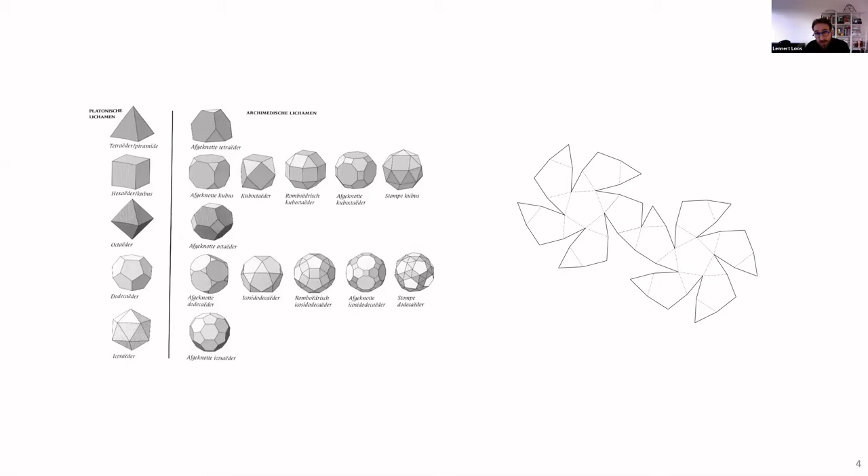And the two people that you see on the picture here are the main forces behind the project. It's Bastien Damsin and Thibaut Brands, and the latter one is currently also a colleague of mine. So we had no idea how to start with such a project. So we read some literature about it, and we started looking up the Platonic solids, and we tried to look for a shape that allowed us to approximate a bit a spherical shape, because in the end we need to inflate the entire structure. And so by unfolding the entire geometry, we created a kind of cutting pattern, as you see on the right, and then the main job starts.

So you buy sheets of foil, you have some patterns that you need to cut out, then you cut all these patterns and you tape them together. And so we used tape in order to seam all these different patches of foil, but we also explored other ways of manufacturing. For instance, welding different sheets of foil together with the help of ironing and burning these edges together, or melting these edges. And so that's what you see here.

So in the end here, we have a lot of flat material connected to each other, but still flat on the ground. And then the first test was to actually inflate the entire structure. And that was the first time that we were able to actually feel and see how the structure reacted on being inflated. We could see how much force it could take, how our duct tape was actually working. And you see that we use very high-tech equipment like the fan of the secretary's office. But in fact, this was the first time that we actually gained knowledge about this kind of structure.

And I like this picture a lot because it shows the different scales and it shows the process that we have been through, starting from very small paper models. And in the background, you see not a flat paper model, but an inflated, more round structure, partly inflated. But obviously, in the end, we wanted to organize a whole range of events inside this entire structure. So I think it was a good idea by the students to already organize a screening inside our first and last prototype that we made, because we had no idea how people would react while being inside and being surrounded by plastic.

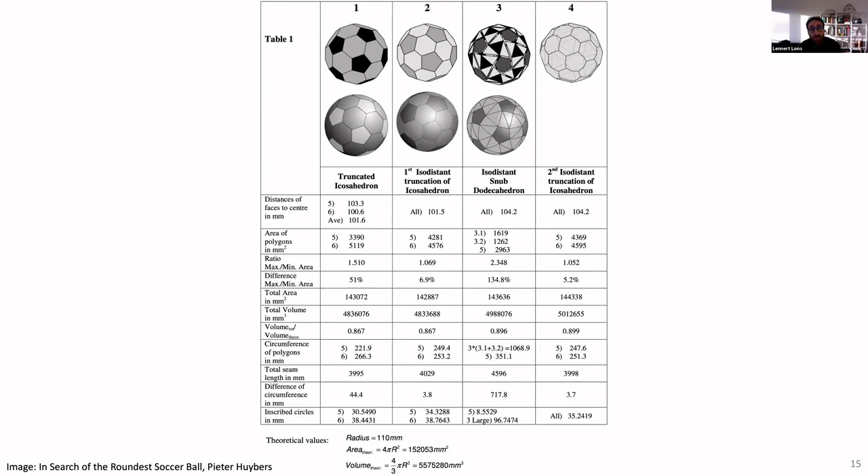And the duct tape was in fact the most expensive part of the structure. It was 50 cents per meter. But if you do that for a large air bubble with a diameter of 15 meters, then it adds up quite quickly. So that was not really a good option.

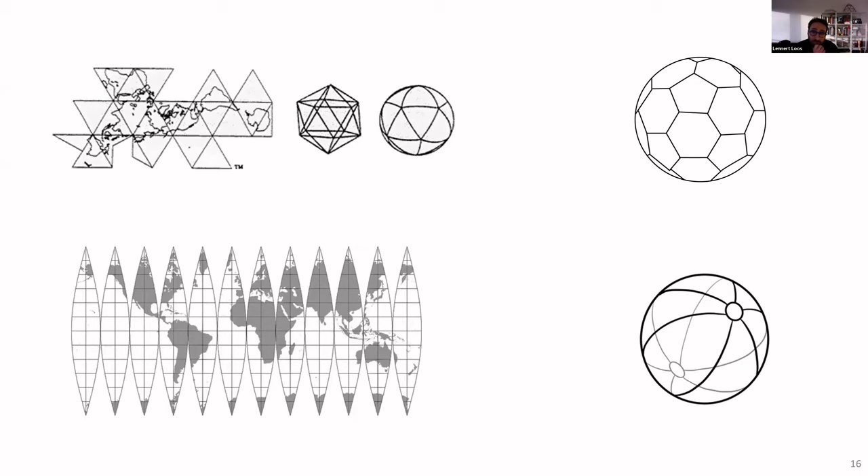So at first we were thinking about Dymaxion maps, the Dymaxion maps of Buckminster Fuller, and relating that to the final structure. But we shifted from that idea towards, let's say, a beach ball or the more regular Mercator map. And so with all the knowledge that we had about the time needed to cut, the time needed to patch everything together and to apply tape, we optimized a bit for minimal tape length.

And this is what came out. And then we had equal parts that could be cut out multiple times. So we laid out a pattern on the floor, and then we aligned our sheet of foil on the ground and we cut it out. And as you can see, this is a very, very quick process.

Jokes are not working in Zoom, right?

So then we had all these patches of foil, and then the most difficult part of the job started. We needed to tape them all together. Where we started initially with this icosahedron shape, this Dymaxion map, they are all flat, and you can already assemble quite a lot and everything remains flat. While now with these beach ball shapes, with every part of the seam that you tape, your flat structure is becoming more curved, because in the end we are working with a spherical object.

And so that's quite difficult, and we taped not only the outside or the inside, we wanted to tape both the inside and outside in order to reduce the air losses in the large balloon. And so we started at the outside, and once we had the outside seams taped together, we blew it up a bit and people could go inside and also tape the inside of the seams.

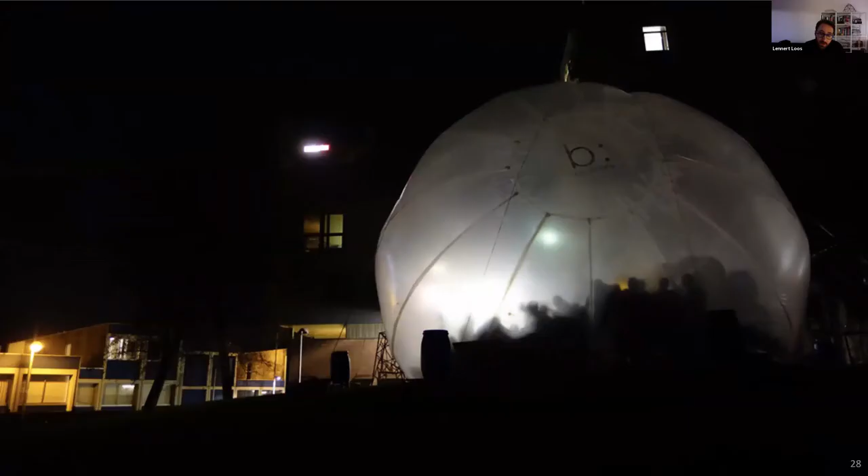We inflated it. We used large vessels of water to ensure our anchorage system, and we used 1.5 meter steel pins in the ground to keep everything at its place. And I think this picture shows very well the size of the balloon. It's a kind of surreal size, and in the end, we were all very happy with the result.

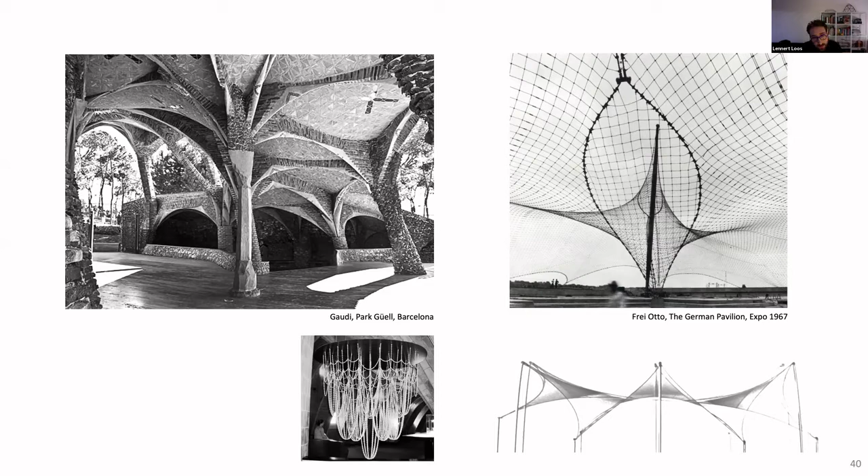And so if you think of modeling and structural modeling, from a structural design point of view, you immediately think about the models that Gaudi and Frei Otto made with the help of hanging chains and soap models, not only to understand the structural behavior or the structural form finding, but also to see what the final structure would look like. Just like the story that I told about the large air balloon, you are gaining insight, you are gaining an understanding based on making models and tests. And based on that, you will proceed in the design. But nowadays we have translated the laws of nature into algorithms, and so we can do it digitally at our desk with the help of computers.

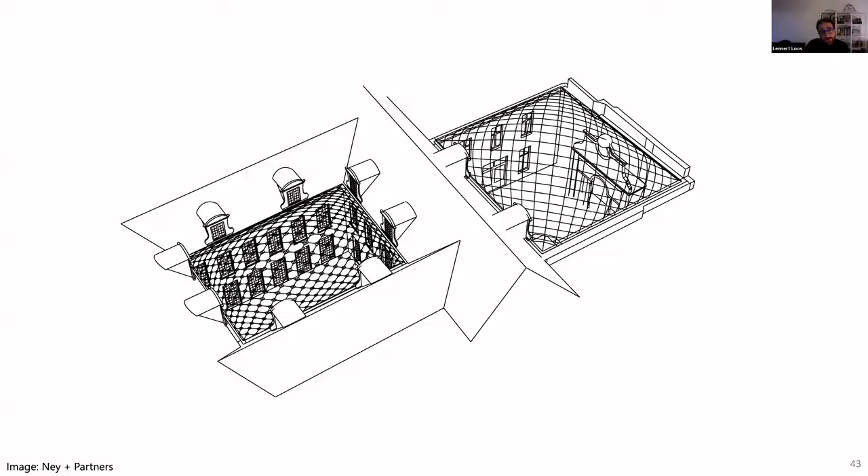But that brings to the front the question, in what way are we actually gaining insight with the help of digital tools? How well are digital tools facilitating design? In design, it is important that you make comparisons, that you are aware of certain design choices, that you are aware of the impact of that. And so while doing research at the university, I investigated parts of this digital design process. I would like to show a small example to show you the pitfalls that might appear while designing digitally. I would like to refer to a project of Ney and Partners in Antwerp, the Oosterweel house, where the design involved the construction of two glass and steel grid shells on top of two existing courtyards. And so this is what the final result looked like.

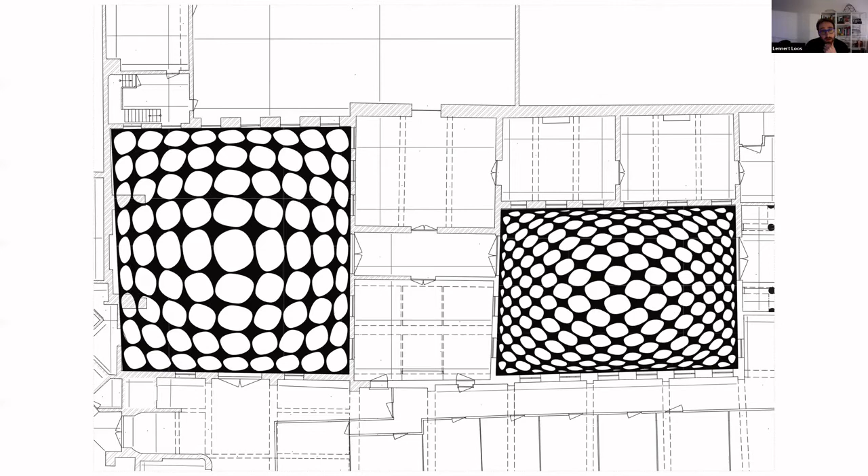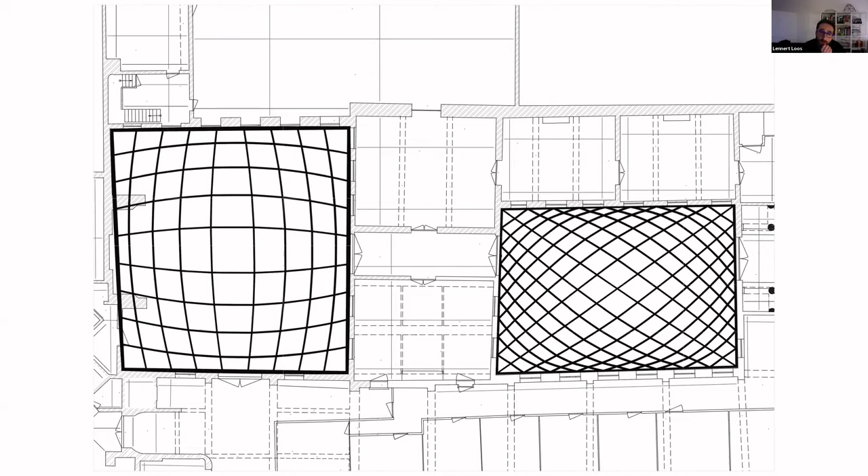But from a digital design perspective, we have a lot of tools available. We can do form finding, we can make structural calculations on the computer, we have parametric modeling tools and optimization. So we have endless possibilities to generate a whole range of design solutions. And that's also what Lauren said in the introduction. There is no issue anymore to explore your creativity and to come up with a million different design alternatives. We can make minor or major changes and come up with a whole bunch of different design solutions. And from an aesthetical, architectural point of view, you can have a certain preference about which design alternative you think might be the best solution.

But from a structural engineering point of view, you want to get informed about the structural behavior, about the total mass of the structure, how sustainable our structure is. You have questions to solve about how it will be constructed, what the reaction forces are on the existing courtyard walls. And these are things that need to be assessed, just like in prototyping. By making comparisons of a whole bunch of design alternatives, you actually get informed about a whole series of these questions. So you get informed about the influence of a certain design parameter and its impact on a whole series of assessment parameters.

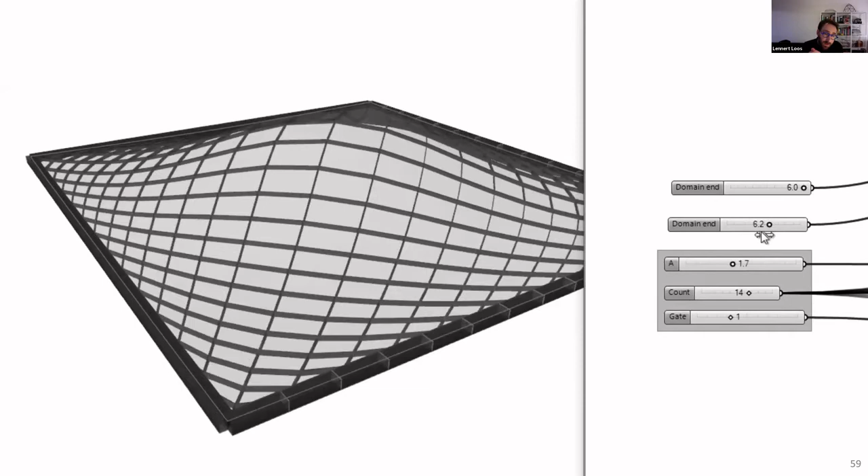So how do we get from a series of design alternatives towards our final choice? And so the question that I will ask today: let's assume that we have parametric models and that we can generate 1 million different design solutions. How, as a structural designer, are we able to actually make informed decisions, and how are we able to understand what these differences between all these different design alternatives that we generate actually are?

But that brings us to the question, are we going to let the computer decide which design alternative is the best solution? Well, what the computer gives you as a solution is indeed the best solution for the boundary conditions that you tell the algorithm to search for. But obviously, as I said earlier, there are a whole range of assessment parameters which are non-numeric, which can hardly be integrated in algorithms, like architectural preferences, certain requirements made by the client, also knowledge from previous work that you have done, certain expertise that you have. It's hard to translate these in a pure optimization algorithm.

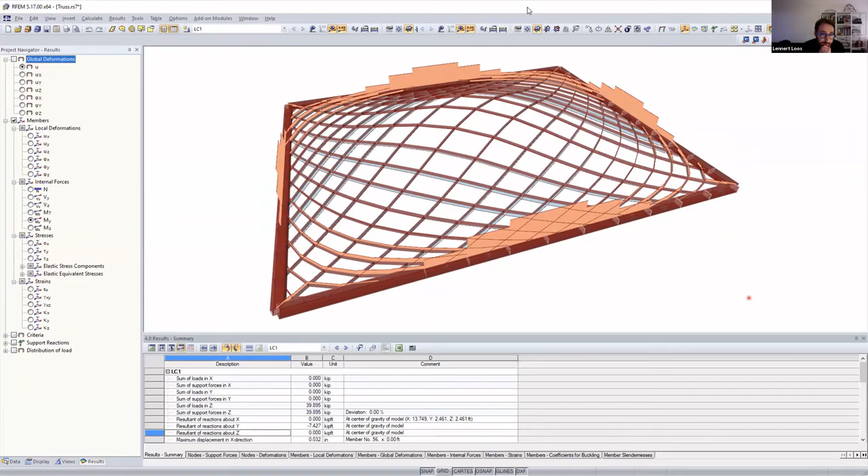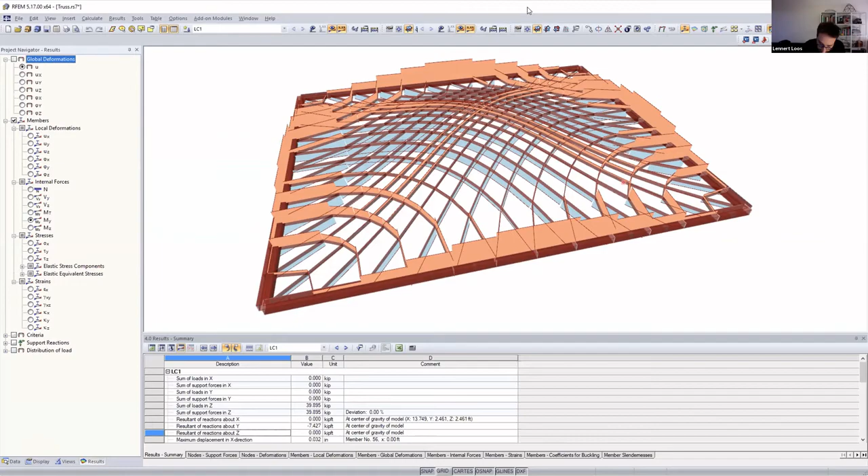So let's go to another design alternative. You see a different layout of the grid. Okay, so you try to understand, we have indeed the same tension forces over here. We have another pattern. Okay, the compression forces are in these elements rather large compared to the previous one. And we have also tension in these ribs at the diagonals. Okay, so we try to memorize and then we go over to a third design alternative.

Okay, other boundary conditions, maybe other grid typology. And so we try to understand what's going on. But by now showing 3 different design alternatives and having arrived at the third design alternative, you all already forgot what the first design alternative was about. And that is actually the main issue with the software structural designers are often using to design.

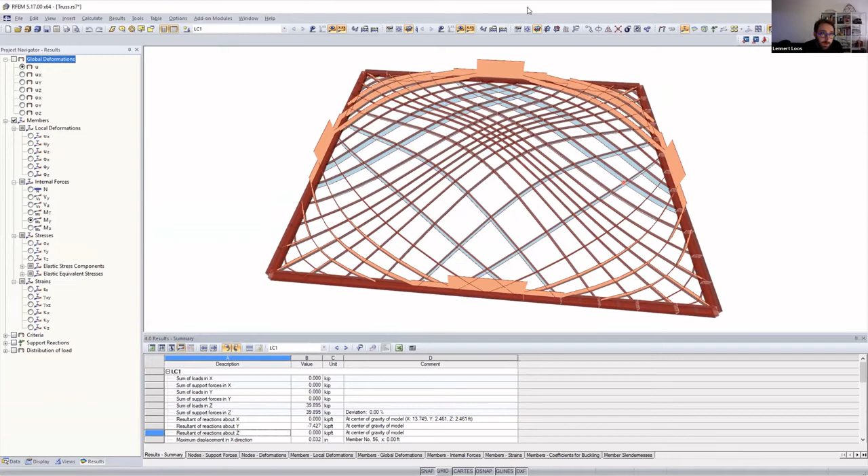But obviously we have all the data at hand. So what you see is that engineers will fetch all the data and then manually post-process all this data in order to make some informed decisions. And this flipping of screens that I'm showing is really what engineers are doing most of the day while actually designing. So these softwares are made to code check and to understand single design alternatives, but not so much for comparing. While comparing is so crucial for gaining insight and for the process of designing.

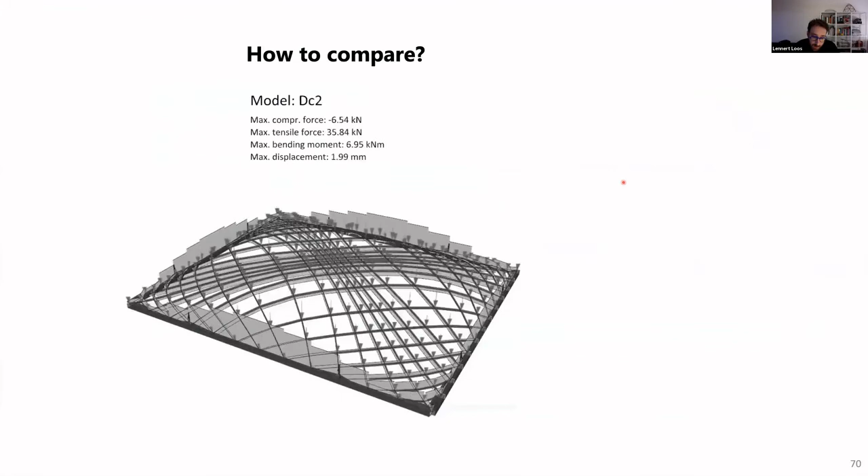So that brings me to the major question of this lecture. How can we compare structurally the behavior of a whole range of design alternatives that can be created very easily with the tools that we have at hand right now? And obviously, as we have all the data, we could use statistics to gain insight in the data that we are working with.

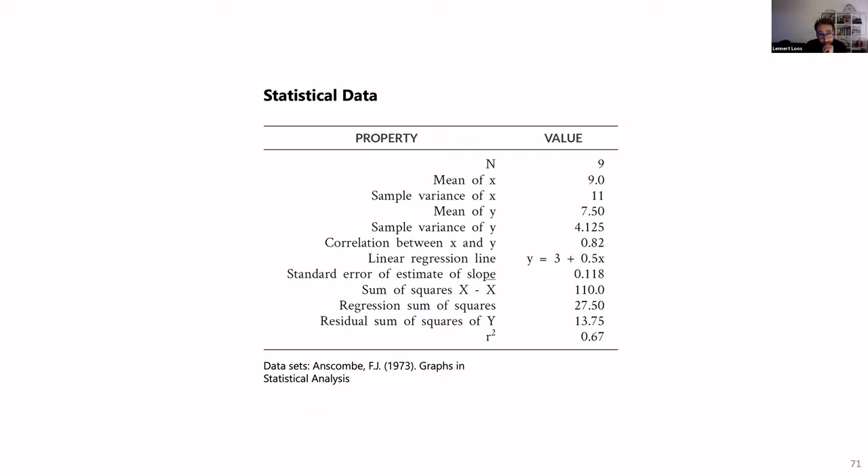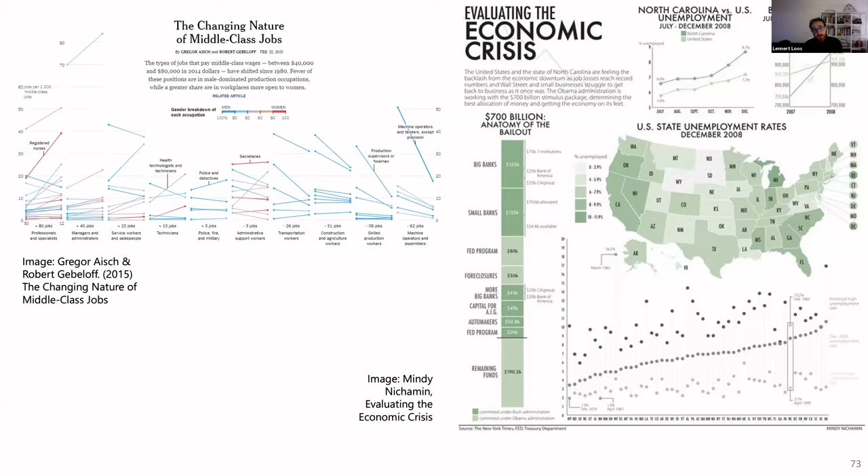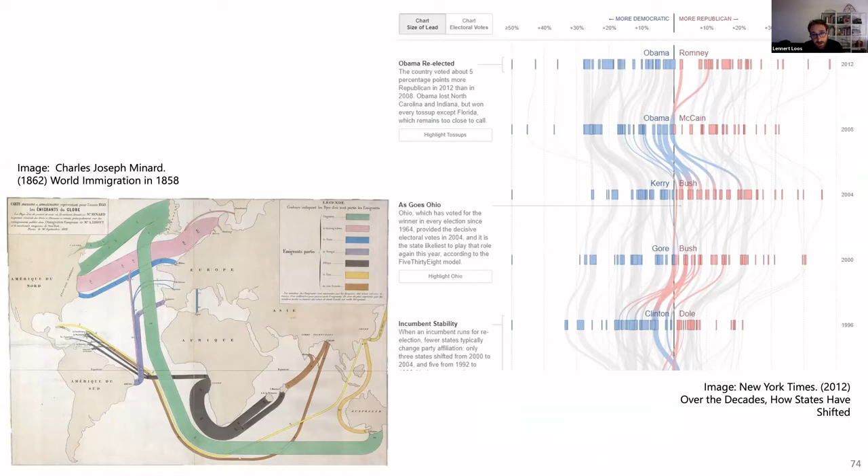And indeed, we see in a whole range of other disciplines, such as economics or social sciences, that data visualization is not only used, as in this case, for presenting complex data sets in an understandable way, but that it is also used as a way to explore your data and to understand what's going on in your data. And so the main question I wanted to answer in my research is, can data visualization help? Can it be of any help to actually gain insight in the complexity of data sets that are embedded within a whole range of structural models or alternatives?

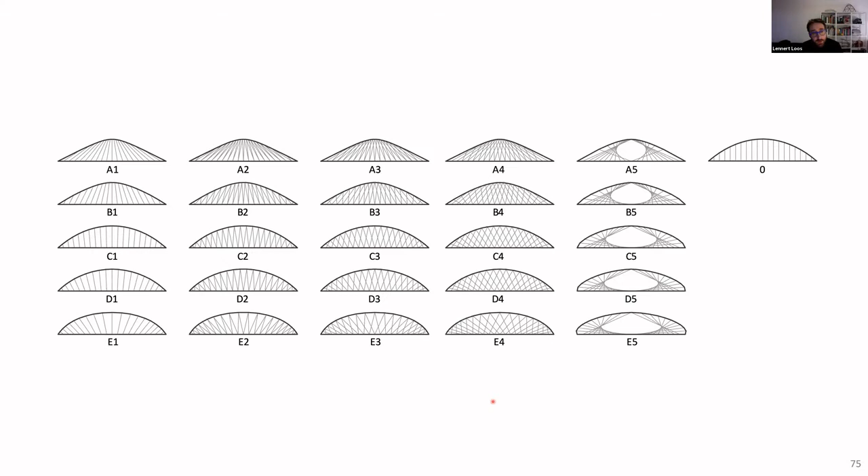These geometries are all form found, which means that in some way they are all very efficient, but as they differ in geometry, they will also differ in structural behavior and in performance. And so what you see in structural design offices, and I think it's good that that is done, is that you try to compare different design alternatives, you try to look at the maximum forces that appear in your structure under several load cases, and also what the displacements are. And based on that, you make informed design decisions.

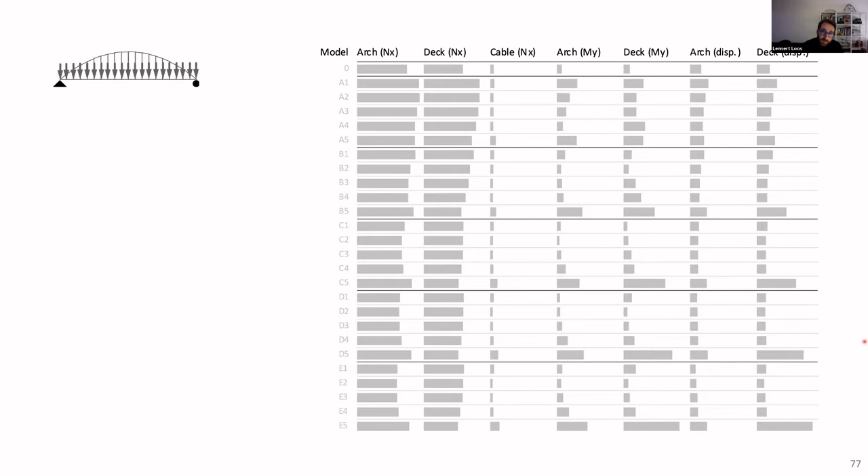So what I tried to do with the data set of 26 different design alternatives that I showed earlier is to translate such a table into a visual table. And it's not very high tech, obviously, to do this, but it gives a whole new perspective on working with data, as you can see the values visually, and people are trained to immediately see differences in such bar charts. And especially when you are able to relate your visual representations back to the geometries you are dealing with, you are able to gain certain insights based on design decisions.

So for instance, what is the influence of using this very sexy cable configuration? Well, if we look at the first three columns, which represent the actual forces in the arch, deck, and the cable, you can see for the arch and the deck that the internal forces are not very different from the other design alternatives. For the cables, the internal forces are obviously a bit larger, so it doubles the magnitude. But what you see especially is that the bending moments in the arch and deck, and also the displacements in the arch and deck, are very big compared to the other design alternatives. And so plotting this table allows you to quickly understand certain design decisions in the perspective of the other design alternatives that you came up with.

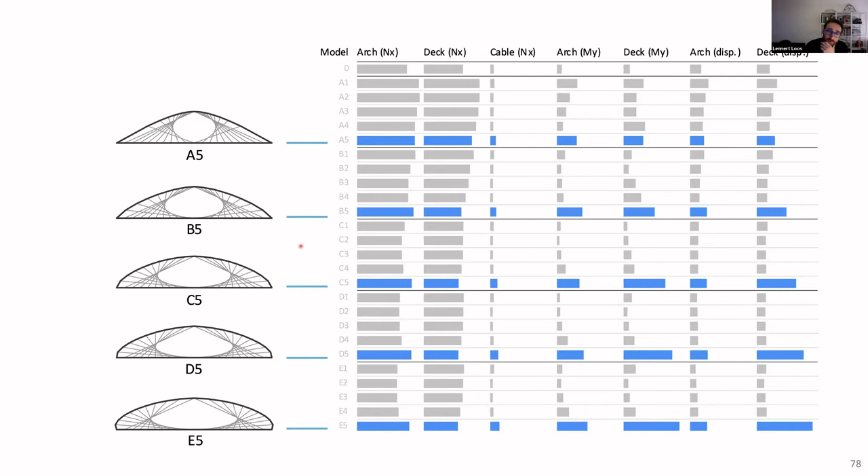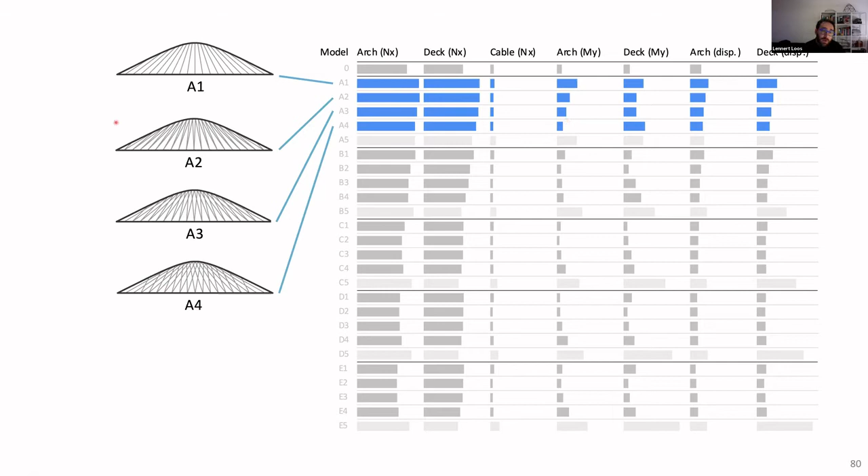Let's have a look at other cable configurations. So we keep the same form of the arch. What if we go from a single cable configuration to a triangulation and towards more and more intersecting cable configurations? Then you can see a slight reduction of the internal forces in the arch and deck. But especially you can see that the bending moments in the arch are decreasing a lot. And so we have all the data at hand, so why not just visualize it, link it back to the geometry, and get informed about what we are dealing with. And some other things could be visualized in order to gain further insight.

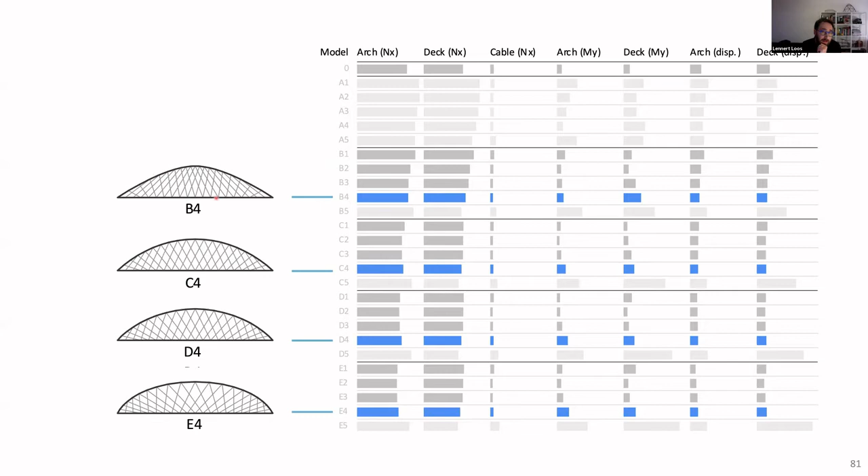But this table is in fact based on the maximum force in the arch, deck, and cable, and the maximum bending moment in the deck. But that's just one local value in the structure, and it's not always a good idea to summarize your entire structure just by maximum values. So what I tried to do in this graph is, can we assemble all the available data into a single graph and represent the structural behavior of all different design alternatives? And that's what you see in this graph.

So all the different design alternatives are plotted in here, with at the top part the tension forces in the deck, and at the bottom the compression forces in the arch. And so you see in blue the design alternative that is shown on the left, and you can clearly see the progression made while going from one side of the bridge towards the other side. And so you can see that our internal forces are rather large near the ends in the arch, and that they are decreasing, going more towards zero, in the middle of our bridge. And it allows you to not only understand the structural behavior, because in some way this is very similar to the force diagrams engineers are used to working with, but it allows you to put it into the perspective of all these gray behaviors of the other design alternatives.

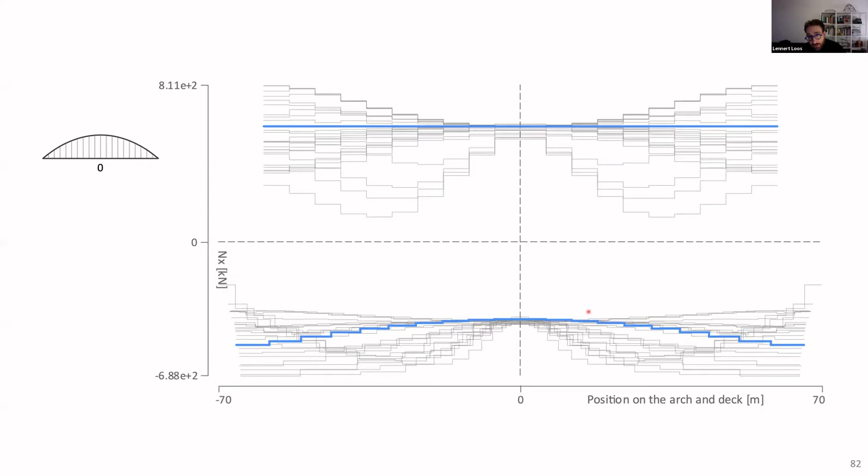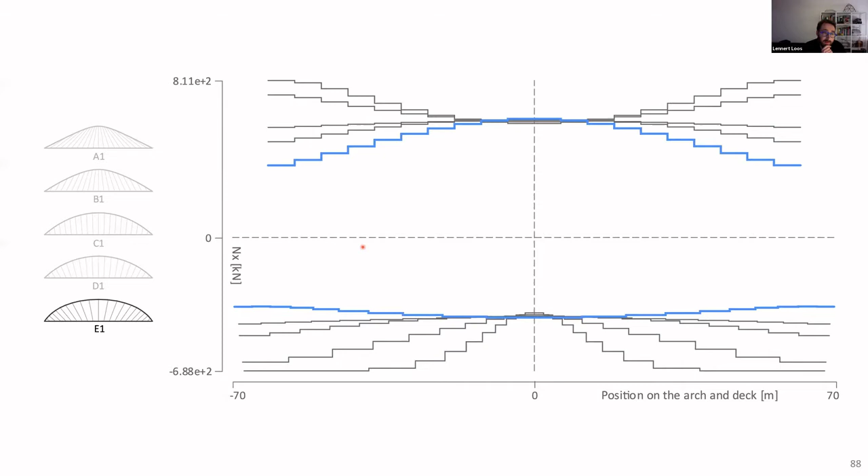And so again, if you are able to relate your structural design alternatives with your graphs, then you are able to gain further insight. So we are making progression from a more steep arch towards a more round arch. And then you see that the internal forces are decreasing while getting towards a more round arch. And so we need some digital interfaces that allow you to work more easily with data and to more easily do data operations in order to gain an understanding of all the data that is embedded in our digital models, I think.

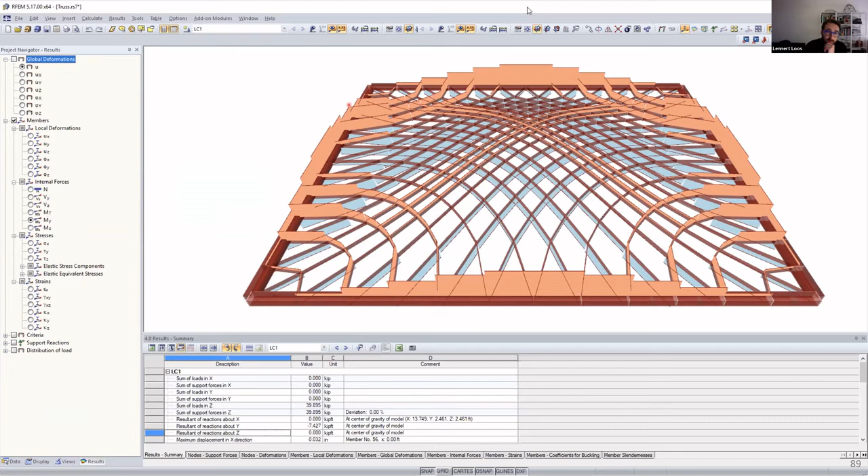But in the end, bridges are quite easy in the way that the representation can be done quite easily. It is a one-dimensional structure. You go from one side to the other, from -1 to +1, so to say. So let's increase complexity and go back to our grid shell model, which is in fact a two-dimensional structure. We have a Y and an X axis.

So in order to investigate this, I created 16 different design alternatives with different grid layouts, different support conditions, and also different overall shapes. So the C stands for compression only. These were form-found design alternatives, and then we have a free-form design alternative, or an alternative for the overall shape, which is just an architectural choice that has been made, but it is not structurally informed.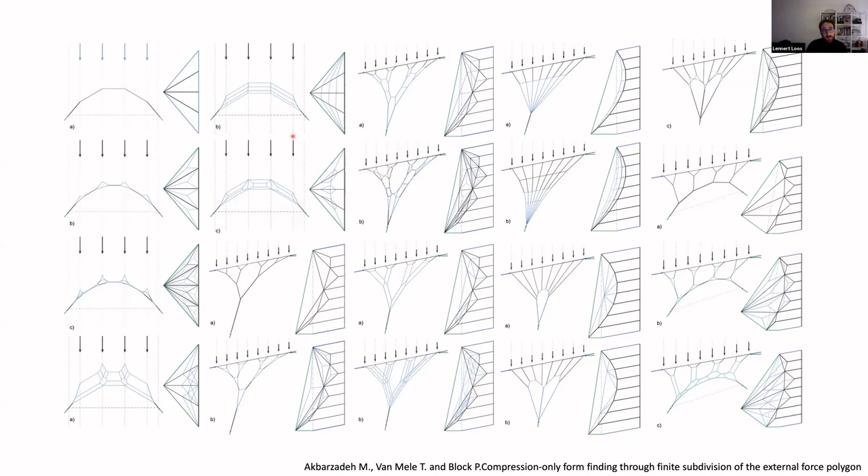And that was missing in the graphs that I showed you earlier. So I think it is important, and graphic statics does that very well, that we should have a certain link between the geometry we are working with and the data we would like to investigate further, in this case, forces.

So what, for instance, if we go back to the grid shell design alternatives, what if we would like to see where these 15% largest compression forces are located in the structure? So that is this selection in black. Well, when you have an interactive design environment where you can make these selections rather easily, you can visualize where these elements are located in your different design alternatives.

And by doing that, you are able to see certain similarities between different design alternatives. So for instance, in this case, you see that the largest forces are in the diagonals. Here, where we have other support conditions, but still we have the largest forces according to this diagonal pattern. We have other design alternatives where it appears in a more hashtag shape.

And so it is really important that we are able to work with the data, not only by plotting graphs, but that we are able to handle the data very easily. And so we can create graphs where we can make selections like I showed you here, and then refer back to our structural geometries. This is another graph: on the vertical axis, the axial forces, so the normal forces in our grid elements, and on the horizontal axis, the bending moments. By making selections, we can see which element is located where in the structure.

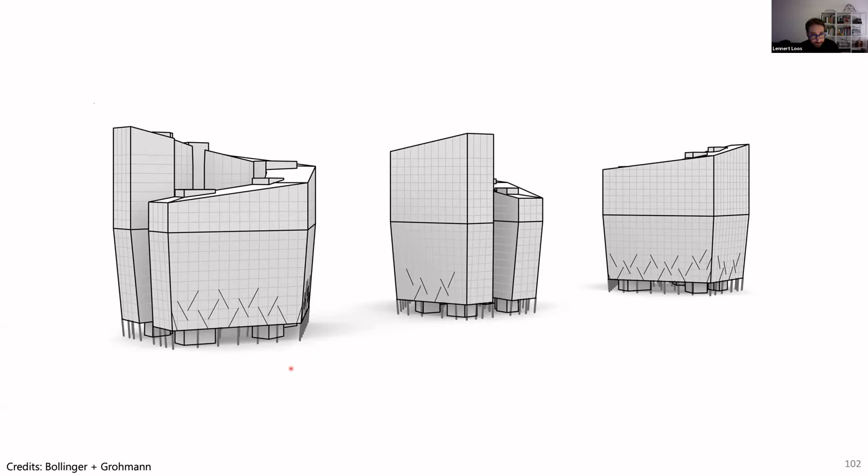So the design question was, where do we put cables in the facade in order to come up with a suitable solution? And so the structural system of the facade was like this, where we have vertical columns in the facade, but at ground level you see that we have only half the amount of columns present in the structure. And so the idea was to include cables in order to keep the bending in this transfer beam rather limited and to keep the entire structure slender.

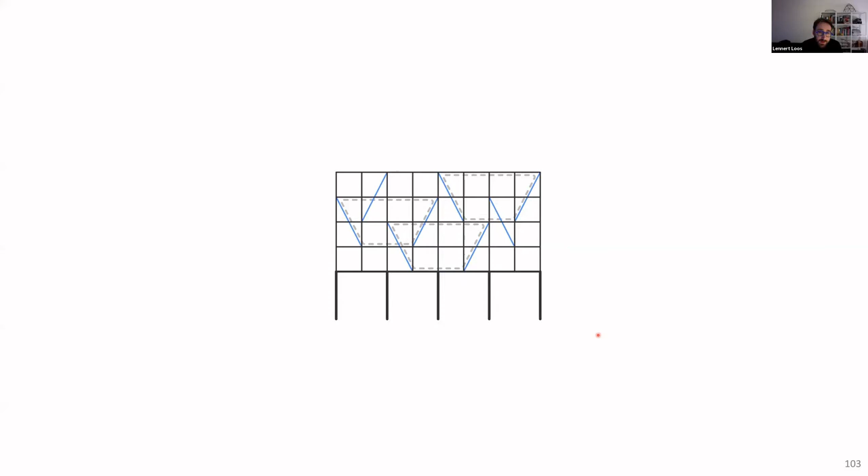And obviously we could opt for performing optimization algorithms and mathematically looking for the best solution, but that would give very predictable results. And from an architectural point of view, the engineers and architects chose to opt for a solution where the cables were randomized in a homogeneous way across the facade. So something you are seeing right now in blue.

Okay, what are the tools of the engineers? So I showed you the process, cycling through windows, handling and post-processing the data in Excel, which is very time-consuming. And also the representations we have for understanding the structural behavior are quite difficult to read, and also they haven't changed for the last 50 years.

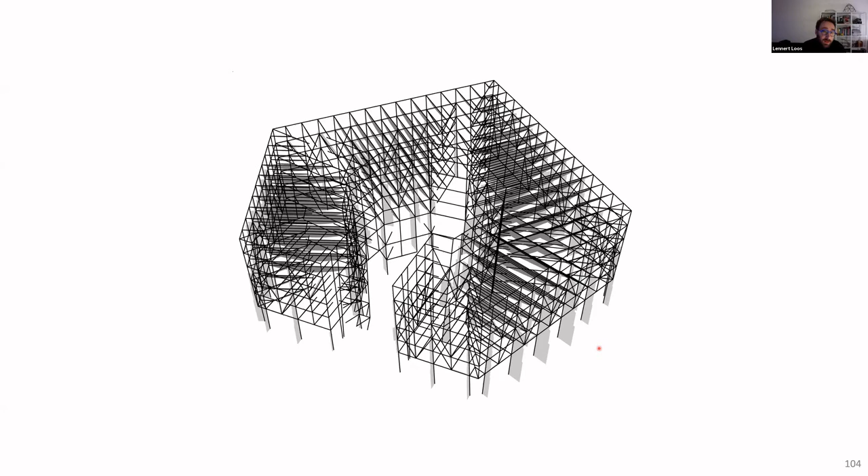So I think working with data can really help to gain insight in structures more quickly. But even if we make it clearer, so let's make a selection of the facade only and just display the beams and columns and cables that are present in the structure, even with these different design alternatives with different cable configurations, only comparing these two design alternatives becomes very difficult.

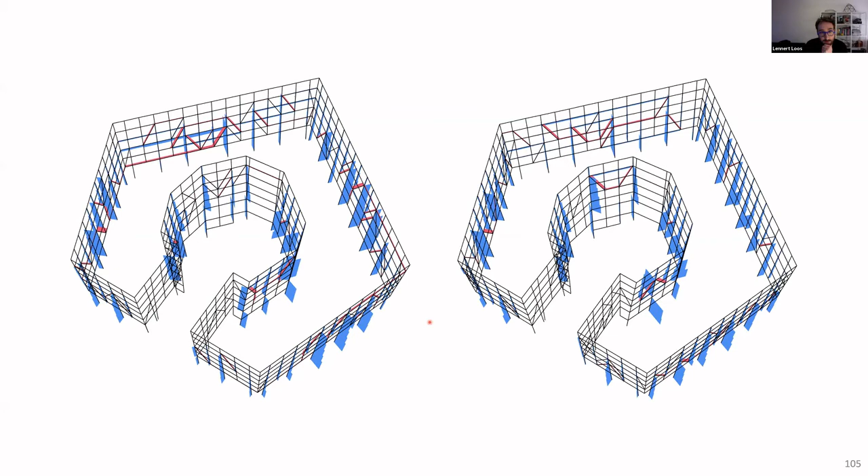It's very hard to see what the differences of the cable configurations are and what impact certain differences in cable configurations have on the total performance, the structural performance of the structure. So the first thing to do then is to manage your data wisely.

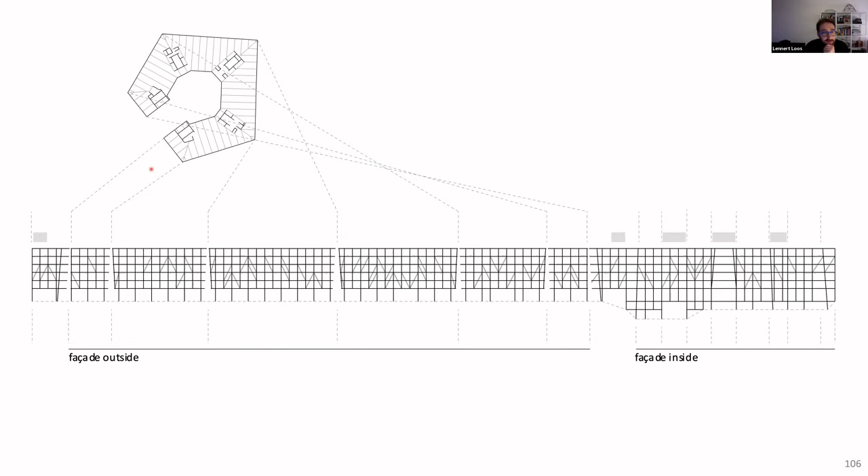And then when your structural model and your data model is structured quite properly, you can unfold your entire facade and you can make a representation of what your facade looks like. So you can easily see where your cables are located. You can apply certain line thicknesses and colors inside your facade in order to see what is the local effect of applying a cable in a specific position.

But then you also see that I put some line graphs underneath, which are giving additional information locally about the configuration of the cables. And so what you see is, for instance, in the first graph, what the reaction forces at the ground level are for different design alternatives. So you see not just a single design alternative is plotted in these line graphs, but a whole range of different design alternatives.

So it allows you to understand a certain design alternative that you are interested in and to investigate it in the perspective, in the context of the other design alternatives. And so you can see that for the forces in the ground floor columns, the influence of cable configuration is rather limited. The range is rather limited.

But then if we look at the deformation energy in beams, so how much deformation is taking place in the horizontal elements for each facade part, then you can see that there are structural design alternatives that show very hysterical behavior because of their cable configuration.

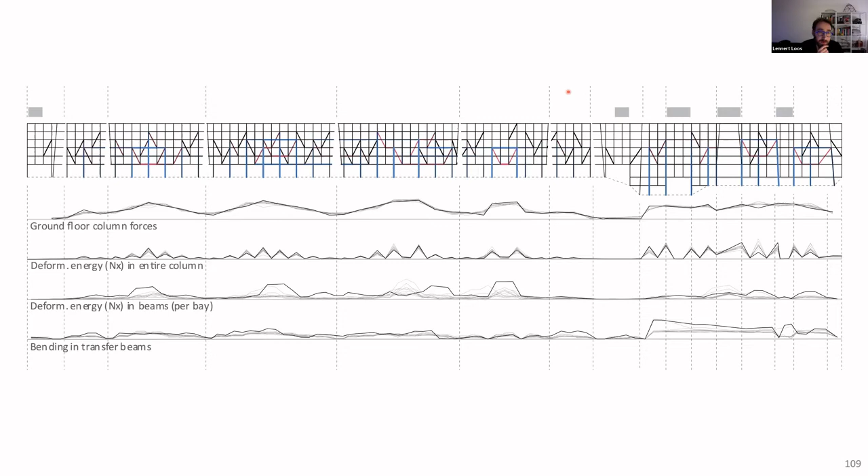We also used evolutionary optimization algorithms in order to get a certain randomized pattern. And we wanted to look at what the influence of certain cable configurations was. And so finally, we did not end up doing everything digitally. We just plotted these representations on paper. But by doing that, we were able to characterize certain parts of the facade that were working structurally very well and parts of the structure that were working rather badly.

And based on having all this patchwork of well-performing and bad-performing cable configurations, we were able in the end to reassemble a facade geometry with a cable configuration that was, first of all, quite well performing in structural terms, but secondly, also from an architectural point of view, it was well performing, as it was indeed randomized.

So I would like to summarize what I have been talking about thus far. We have a lot of data available in our digital models. Is it just geometrical data? I mean, if you make a Grasshopper model or a Revit model, we have a lot of information about angles, about the sizes of plates and walls, what the volumes of columns and elements are that you are using. There is a lot of data there.

If we calculate these structures, we also have a lot of structural data. So why not use it? The question: can we use data visualizations? Yes. So don't work with data in a blind way, don't just use the data, but use data visualizations.

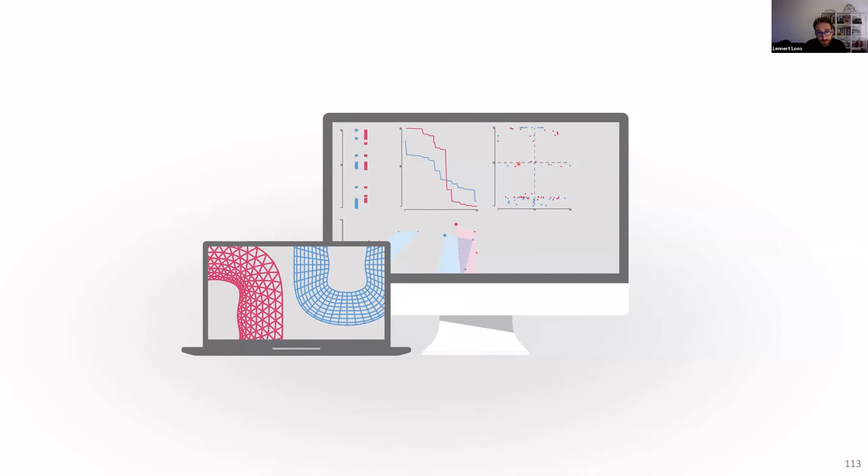But also don't just use data visualizations. You still need to refer back to your three-dimensional geometries. And so that's what this image is showing. So not just the data, not just your structural geometries, but there must be a certain interaction.

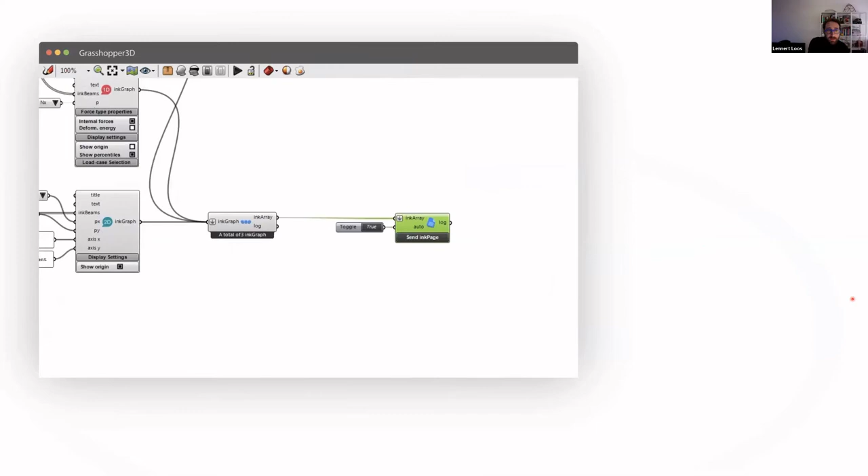And to investigate the interaction, I have been developing a proof of concept tool of which one part was a Grasshopper plugin, and it allowed you to define graphs based on data within Grasshopper, structural data from finite element models, and to plot it directly in an interactive dashboard in the web browser. And so you can highlight certain elements in order to see where these elements are located inside the structure. But the entire thing was fully interactive.

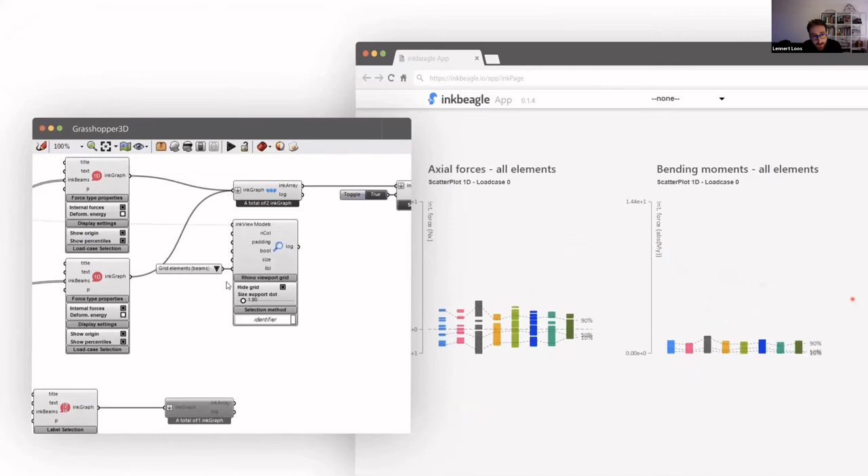And so, for instance, in Grasshopper, if you change a certain load case or you change the data, if you would like to visualize certain elements or highlight certain elements, it could be done. But also the other way around, and I think this is really important, you can start from the graphs, make a selection based on the data that you are seeing, and then refer back to these structural models. And this is something that I think is quite important to mention.

We often start from our digital models or structural models, and we make a selection based on what we think a good selection might be. So for instance, let's take all the beams at a certain floor or all the columns on a certain floor of a building and look at what the data looks like attached to these elements. But in this approach, we are starting from the data, we are starting from these interactive graphs and then referring back to our structural three-dimensional geometries.

And I'm not saying that one is better than the other. I just think they are both very valuable, but that emphasis should be put also on starting from the data and maybe starting from graphs.

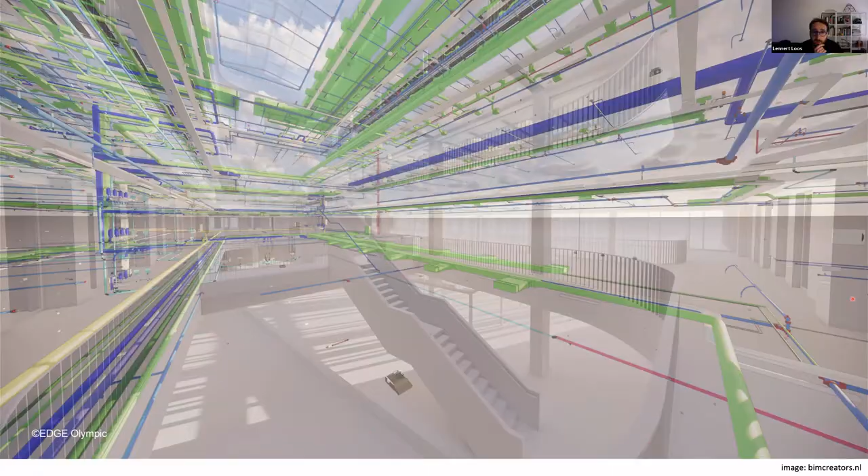So my last words are there. Try to think about how you design. Everybody is designing digitally nowadays; of course you are using paper, but rather soon you will end up designing digitally. Be conscious about how to design digitally. Be conscious about the data that is involved and that you can actually integrate in your digital models.

Try to understand what's going on, and be conscious about certain design decisions, and never make decisions because you think it's a good solution, but because you know it, because you did the check based on the data embedded in these models. And perhaps you could do that based on data visualizations.